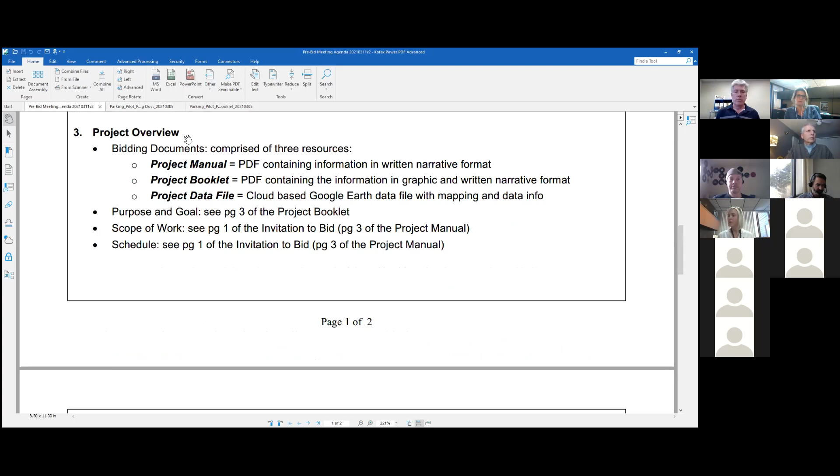Much more detail to the project, and we'll spend some time talking about some of that. Our schedule - if you've had a chance to look at the invitation to bid, you've already seen our layout, and I'll just run through this pretty quick because this is all pretty important.

We're here now today at the March 11 pre-bid conference on Thursday. I don't know how many of you saw the old version of that, but I did put out something that said Wednesday, March 11th - I apologize for any confusion that may have been there. A week from today is our deadline for questions. The following Monday is when we will be issuing our final addendum. And then bids are due a few days later, two weeks from today.

We're measuring time on local time. Somewhere in this timeline we're going to go to daylight savings time, so that's why we're using our clock - it's mountain time. It doesn't matter whether it's standard time or daylight savings time, no extra hours in there for anybody.

After we get the bid opening - bids open on Thursday the 25th - we'll be moving through the contracting award and contracting phase of things. We're anticipating things will go smoothly. We've got a pretty aggressive schedule here to get to a notice to proceed and sign contracts about two weeks, a little over two weeks, after the bid opening. And then there's about five weeks to substantial completion and another week to final completion.

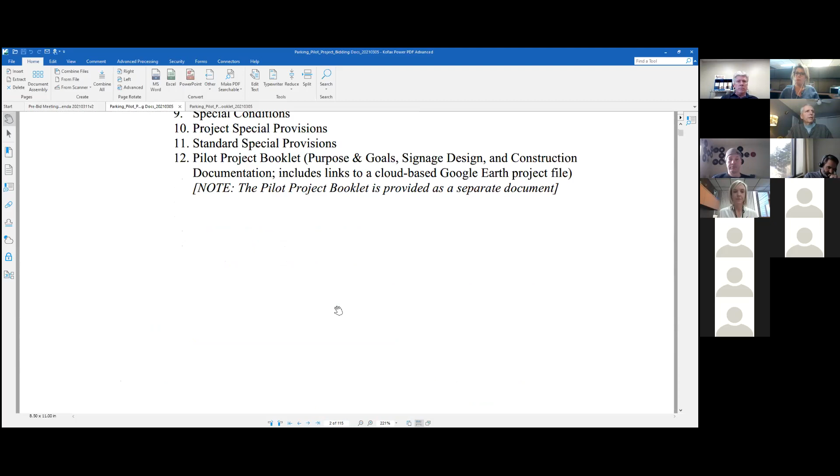Invitation to bid, I think, is pretty straightforward. We've already touched on, at least pre-bid wise, that's probably all the most important stuff we've already talked about.

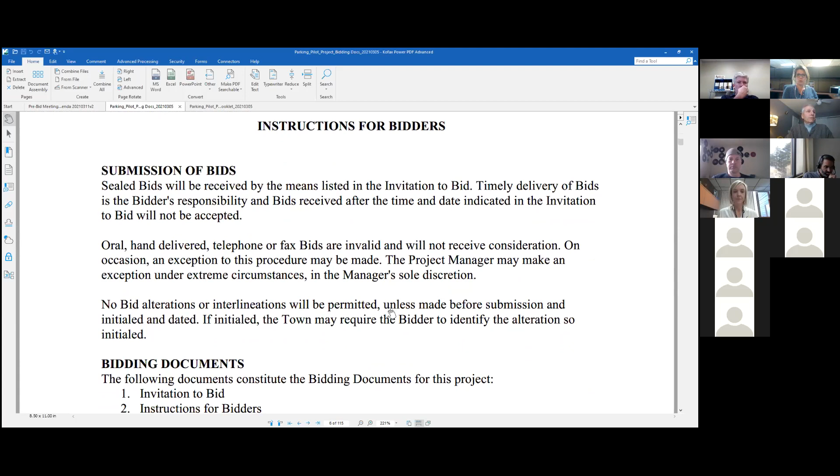Instructions for bidders. There's lots of important stuff in here for you guys and gals. This list here is what will end up being the official list of bidding documents when we get around to signing a contract. So pay attention to all of these documents. Everything except the addenda has been issued to this point.

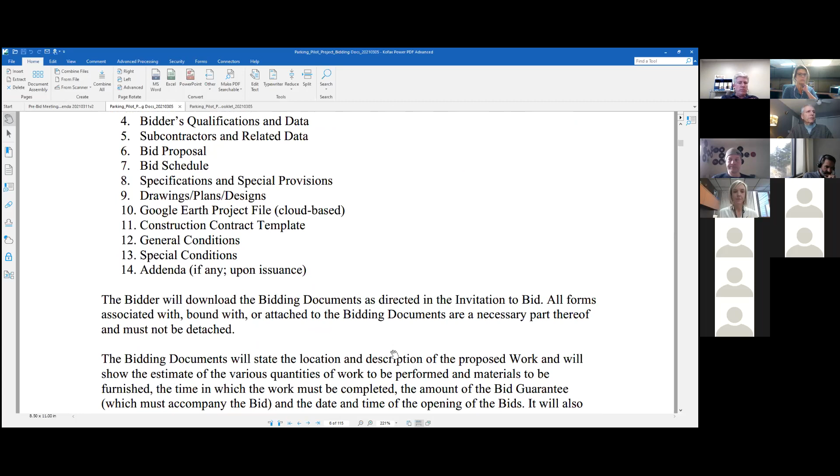Hey David, I just wanted to let you know we did have a Frank Cordova join the meeting, so that you're aware. Oh, well, thank you. Frank, do you want to introduce yourself? Everybody else did, but we'll only make you do it now. Yeah, hi, I'm Frank Cordova with ProPrint Design as well. Okay, great. Thank you, Frank, for joining us.

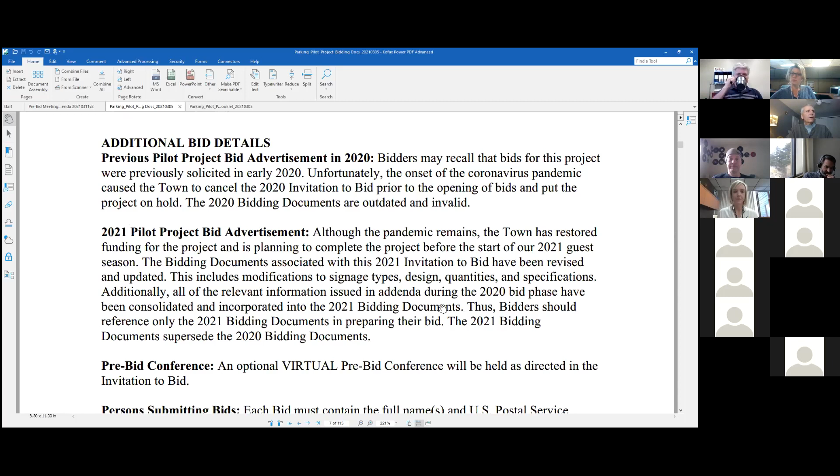This project has one unusual feature. Some of you may be aware, some may not, but we did advertise this last spring. In fact, our pre-bid meeting was just about a year ago. We're a week shy of a year - it was March 18th a year ago when we had the pre-bid meeting. For all practical purposes it's a similar project, but we've made some changes to it. So if you're aware of that earlier project, ignore everything. Pay attention only to the 2021 bidding documents.

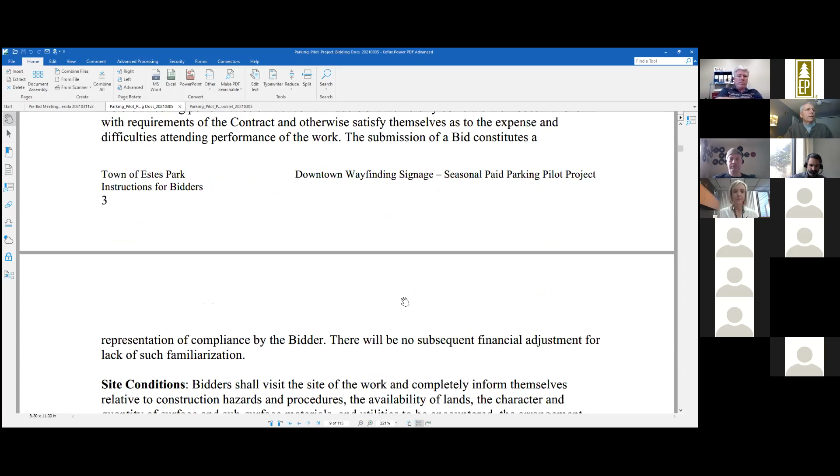Lots of details and instructions here. We will be issuing addenda, hopefully one, if not hopefully two. We are going to be asking for questions in writing. Obviously that's a real straightforward way for us to keep track of the questions and provide thorough answers that are distributed to everybody.

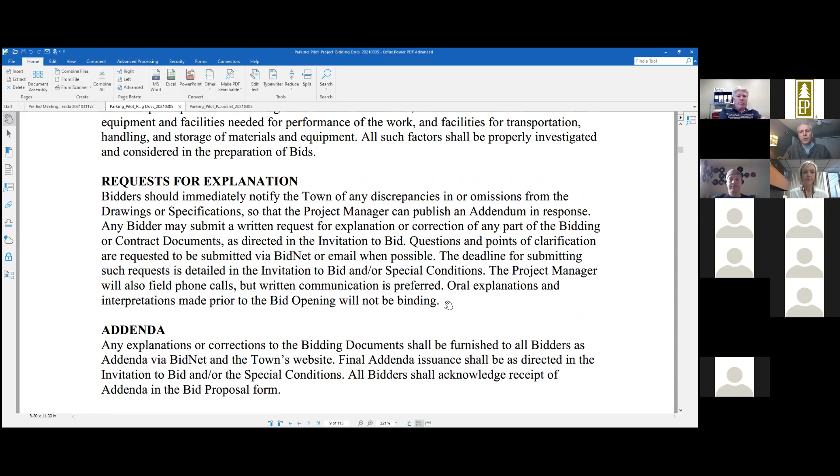There's a bid guarantee required. There's some bonds required as a part of the contract process. We already talked about opening bids.

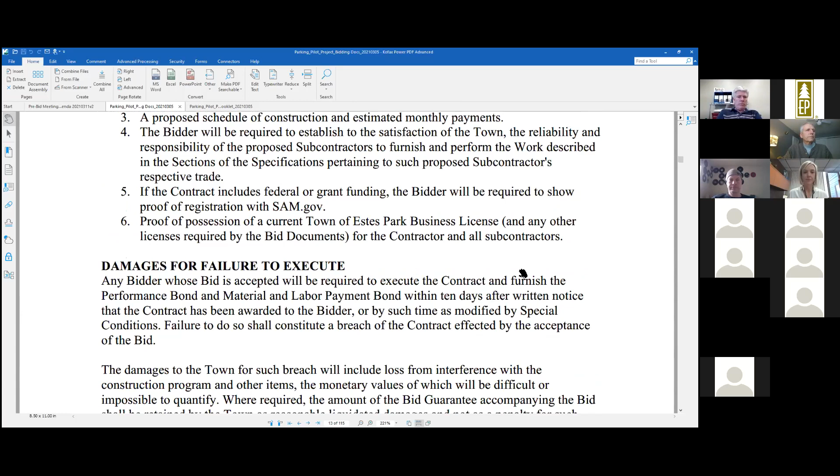We do have a couple of forms for the bidders to fill out. First one is this bidder's qualification and qualifications and data. So we're looking for the bidders to provide some background on the firm and projects. There's also a separate sheet for subcontractors. So that's the next form here, looking for you to identify who your subcontractors may be, so that we can be aware.

Seeing this here, let me just take a sidebar. All contractors doing business in the town do need to have a town business license. So that includes the prime contractor, the bidder, and any of the subs. And so those business licenses can be obtained online through the town's website. If you go to the town clerk's webpage, there are some easy links to find out how to do that.

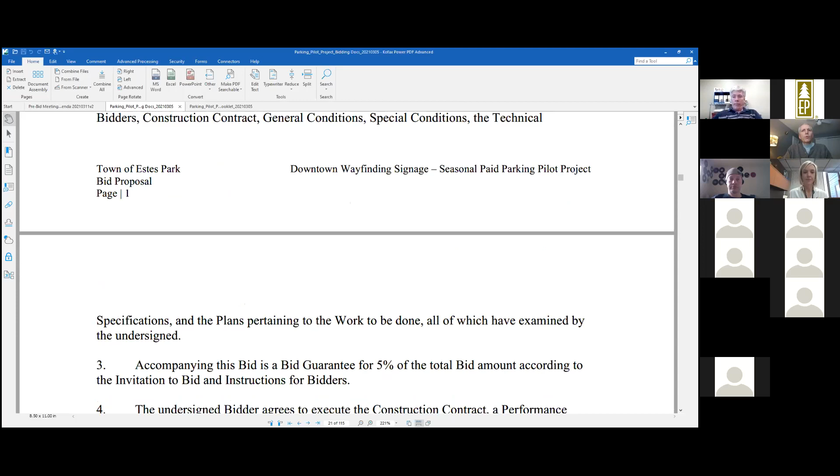The next form is the bid proposal. So this is something you'll have to fill out and complete as you submit your bid. Probably not very much different from what you've seen before, looking for some basic information and acknowledgements. Sign and notarize. And then the bid schedule.

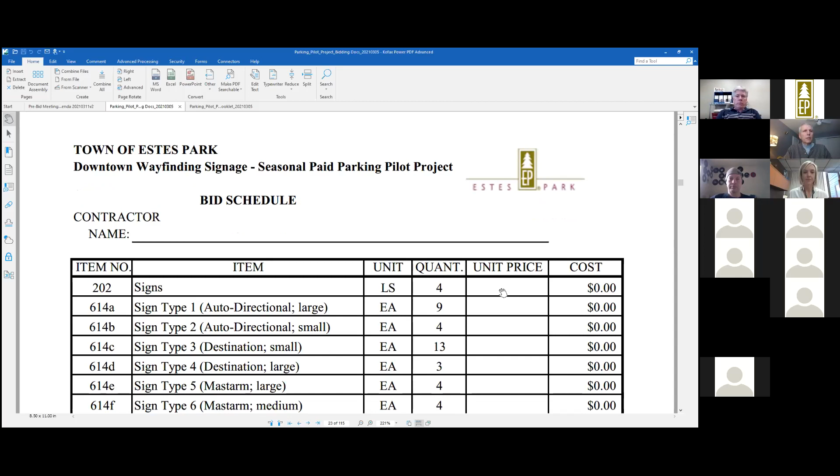There's actually two of these in the set of documents. What we're looking at is part of the PDF set. We've also provided you with an Excel spreadsheet as a part of the documents that you download. You're welcome to fill this out by hand, or you're welcome to use the Excel spreadsheet and let the spreadsheet help you do the math. But I think this is pretty straightforward.

But while I'm here, let me just do another little sidebar. Obviously, I see my first typo, something we'll have to clarify in an addenda. This first line item is actually sign removals. I apologize for the typo, but we'll clarify that. There are some ground signs that we ask you to remove as a part of your work. There's 4 of them, and the locations of those 4 signs are described in the Google Earth file. We have, again, apologies for the typo here on the item.

We do have 10 types of signs that we've identified. There are 2 types of auto-directional signs, and we're real scientific here - we've got a large version and a small version. There are two types of destination signs, again small and large. We'll talk some more about those distinguishing features in a little bit. We have three types of mast arm signs, signs that are going to be mounted on signal pole mast arms - there's large, medium, and small. And then we have some add-on panels that say visitor information or visitor info, and again we have a large version and a small version of that. And then another add-on panel that's free - so the message is free and no installation is required on that sign. We're looking for those panels so that we can add them when we get to the end of the seasonal paid parking period. We can cover up the paid message with a free message.

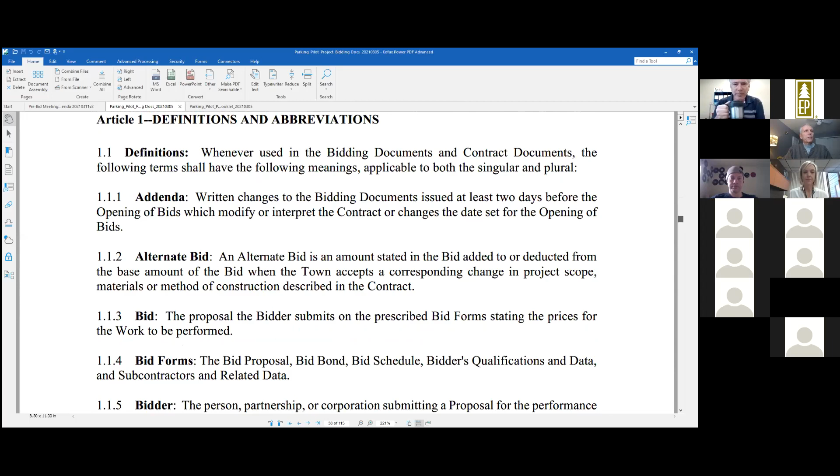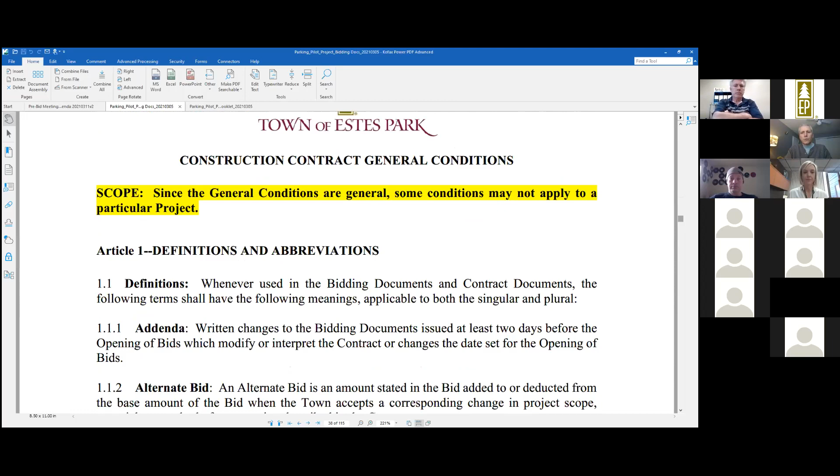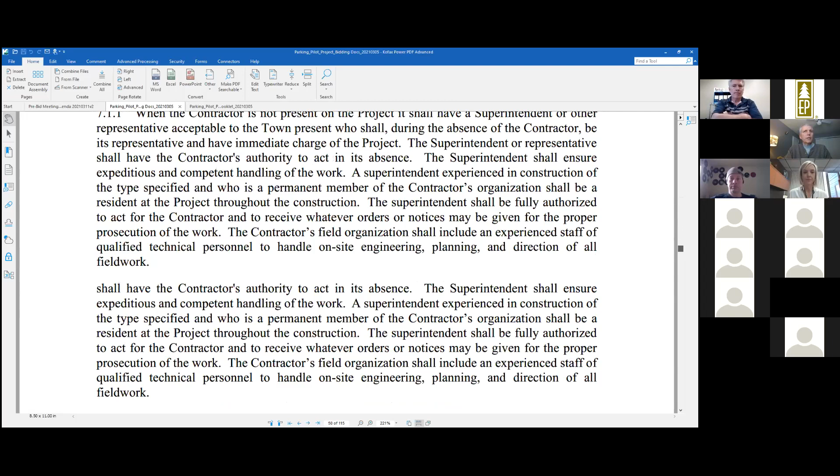The next section is the general conditions. There's another 10 or 15 or 20 pages of general conditions, probably not unlike what you're used to seeing in other projects. I'm not going to go through anything in here. I think it's all pretty straightforward, but if there's any questions on that, you can get clarification through the question and answer process.

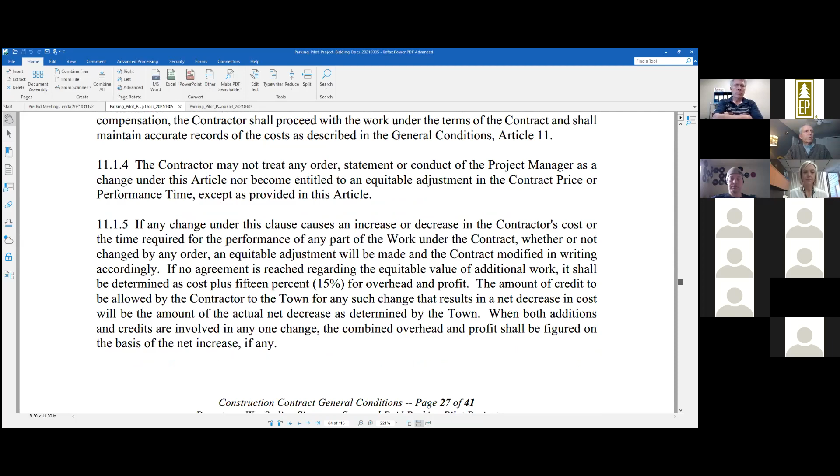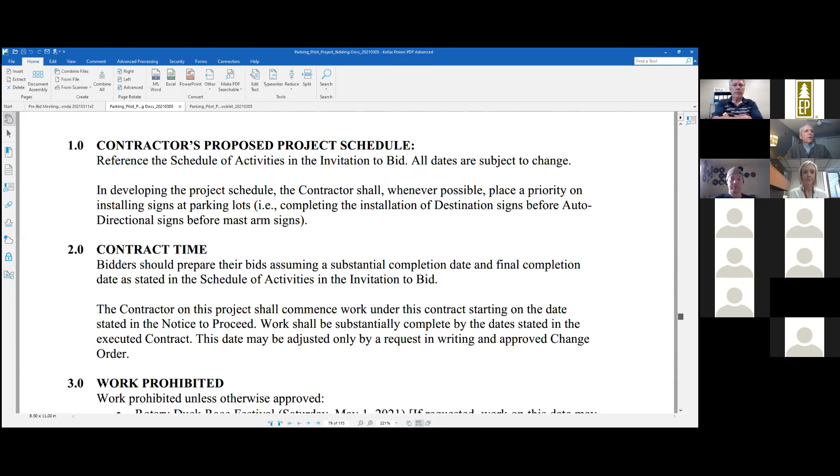The general conditions are followed by the special conditions. Sorry if I'm making anybody queasy as I scroll through things here. So the special conditions, there's just a couple of pages of these.

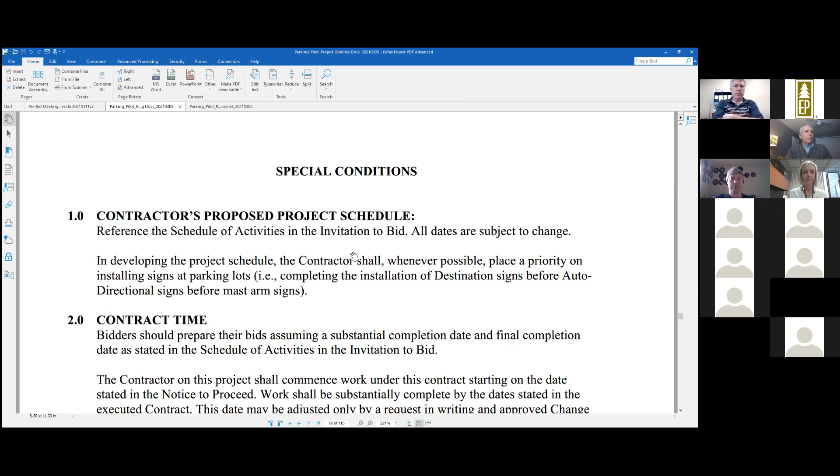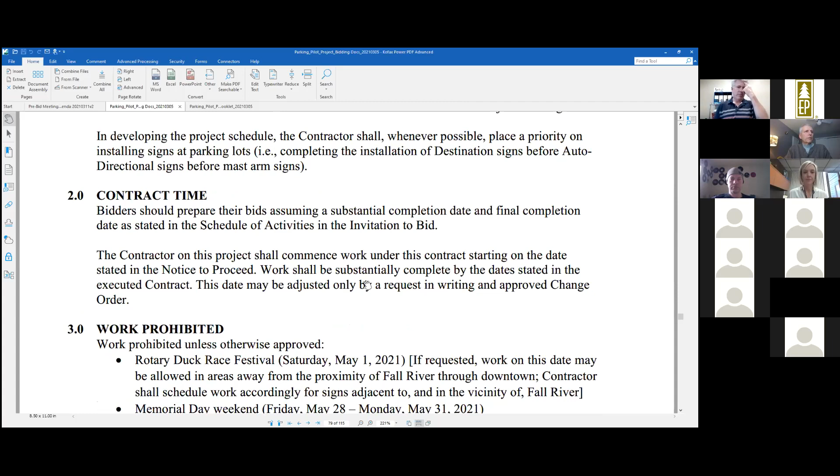We're emphasizing our expectations as it relates to a project schedule. We're emphasizing how we're measuring the contract time.

We do have a long list of work prohibited dates. This is an annual calendar that we would normally include. If all goes well, everything but the first bullet point is going to be outside the time frame of this contract, but we just drop this in as a standard.

As it relates to the first bullet point, this Rotary Duck Race Festival is a fundraiser by the local Rotary Club. It is on Saturday, May 1st. You wouldn't normally be working on a Saturday, so we're just reemphasizing here that if that becomes necessary on your part, some work in some parts of town may be allowed, but in the areas where the festival is going, which is a good portion of the downtown area, it's going to be tough to allow any work in that area on that date.

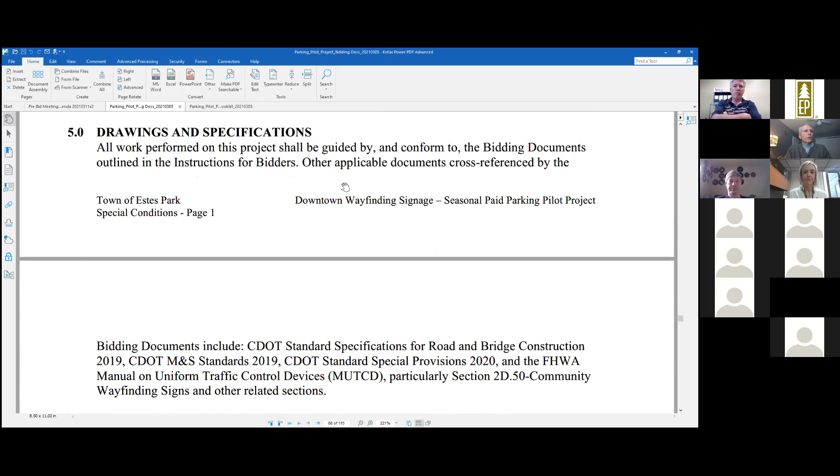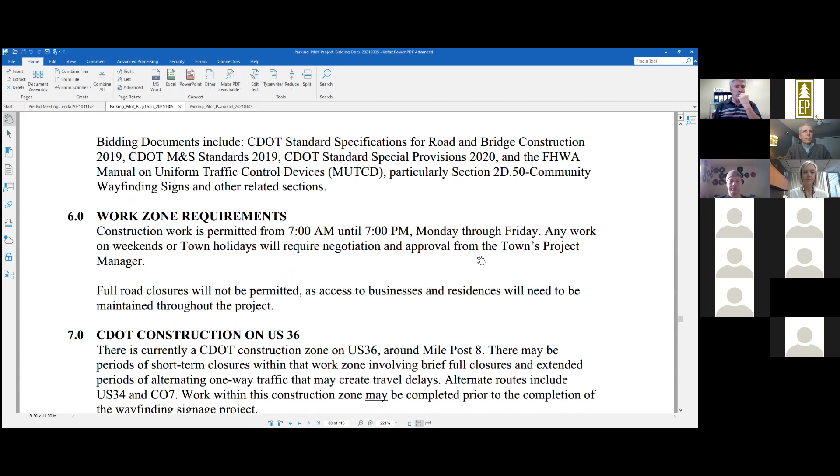Some more listing of general expectations, related to the Saturday work, here's our work zone requirements. Normal work days is 7 a.m. to 7 p.m. Monday through Friday. Weekend work or holiday work needs special permission, so plan accordingly.

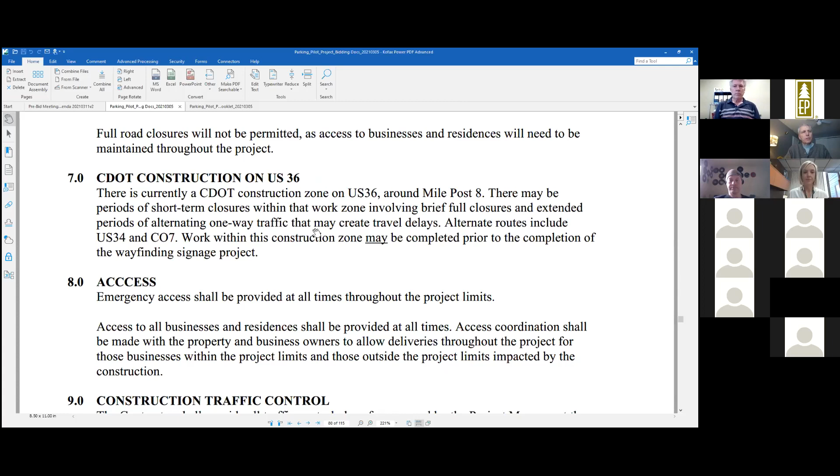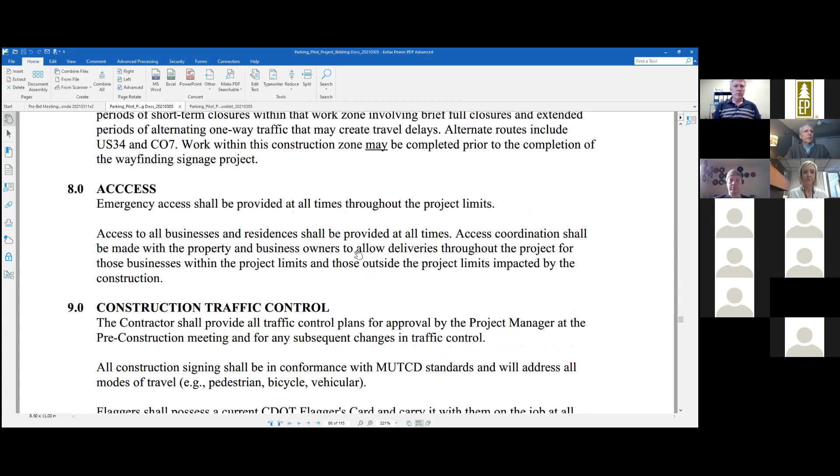There is this construction zone on US 36. Some of you are probably aware of it. It's not nearly as active as it was a year ago, but they are still incurring temporary lane closures as they do some ongoing work. I'm not sure when that'll wrap up. I'm guessing it's winding down pretty significantly now, but that may be something you need to account and anticipate.

Stormwater quality. It is your responsibility as a contractor to determine whether a stormwater discharge permit from the state is required for this project. If it's not required, then fine. If it is required, we're going to expect you to have it and provide us with some documentation.

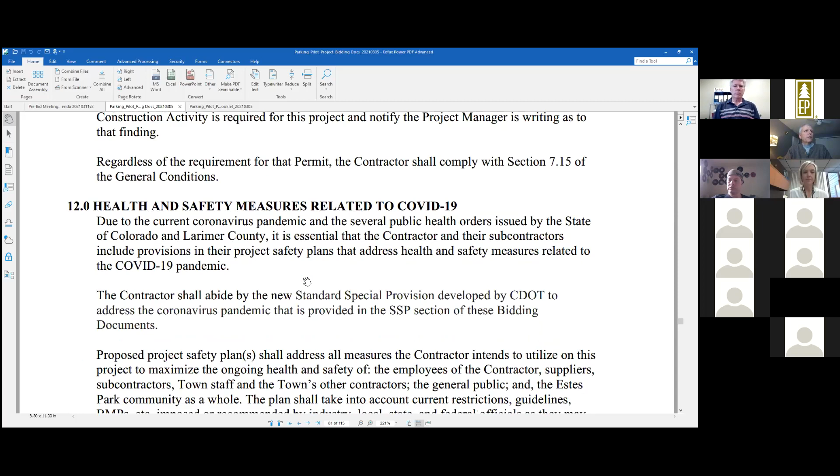Health and safety measures related to COVID-19. I wanted to touch on this because this obviously is something we're all dealing with. We've all been dealing with it for a year now. And even though things are getting better, it's still something we all have to be aware of as far as how we behave as individuals, how we behave with our crews, how we interact with each other. The underlying message here is that we at the Town of Estes Park expect our contractors to follow all state and county and local guidelines. As long as you're following the guidelines, things are going to be fine with us.

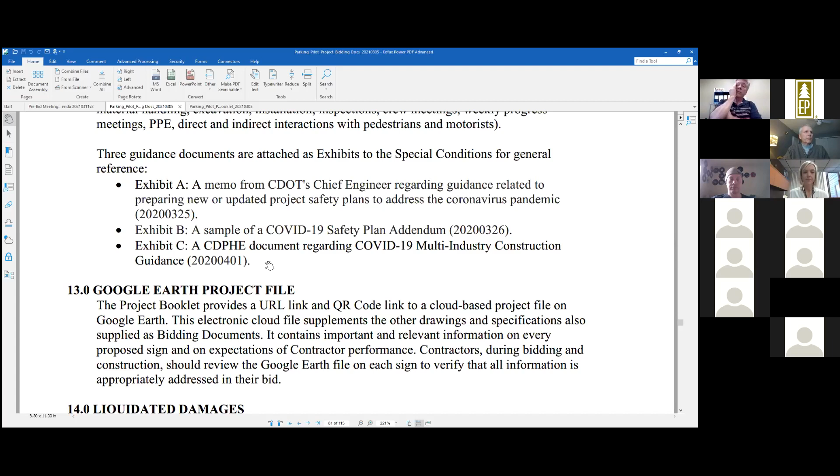There are a couple of exhibits that are attached to the special conditions. They're there for your reference. There's some documents from different state agencies that will help give you some insights to part of our expectations. I mentioned the Google Earth project file a little while ago. We'll get to that in a minute in a little more detail.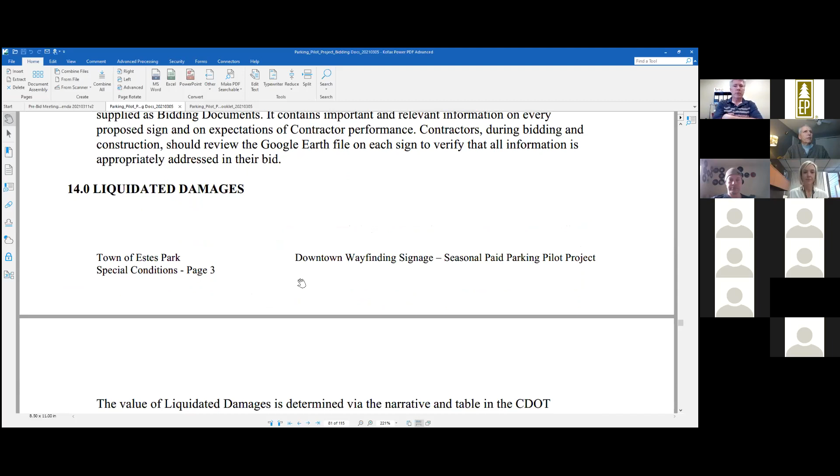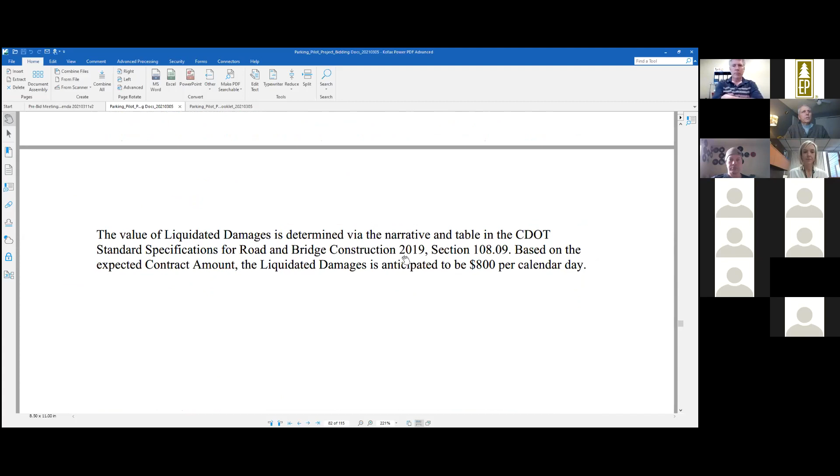The liquidated damages is based, according to CDOT's formula, on contract value, and based on what we expect this contract value to be, we've gone ahead and pulled that out of their table. But you can cross-reference this section of the CDOT specs if you need any further clarifications.

So those are those exhibits I'm scrolling through now.

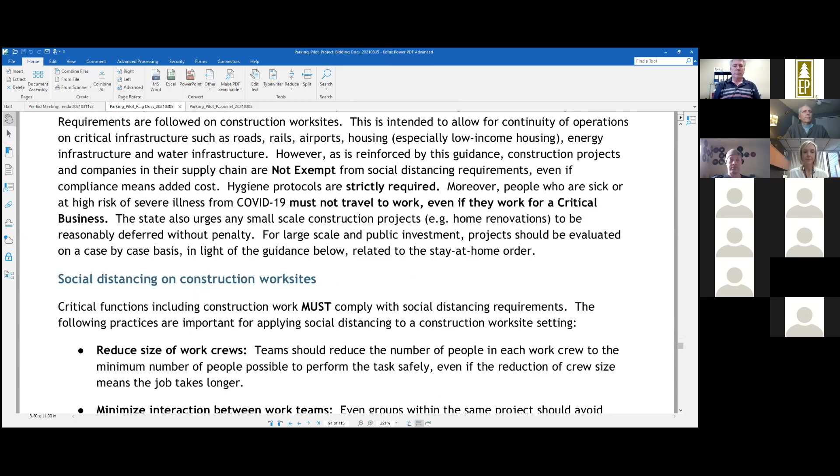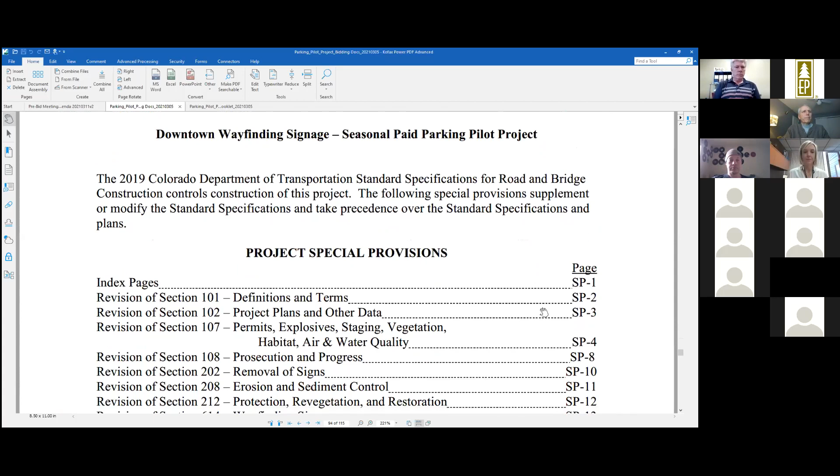And we get to the project special provisions. These are some specifications where we at the local level have elected to modify the state specifications. I'm not going to go through each and every one of these. I'll let you absorb them and offer written questions if you have any. I think they're all pretty straightforward.

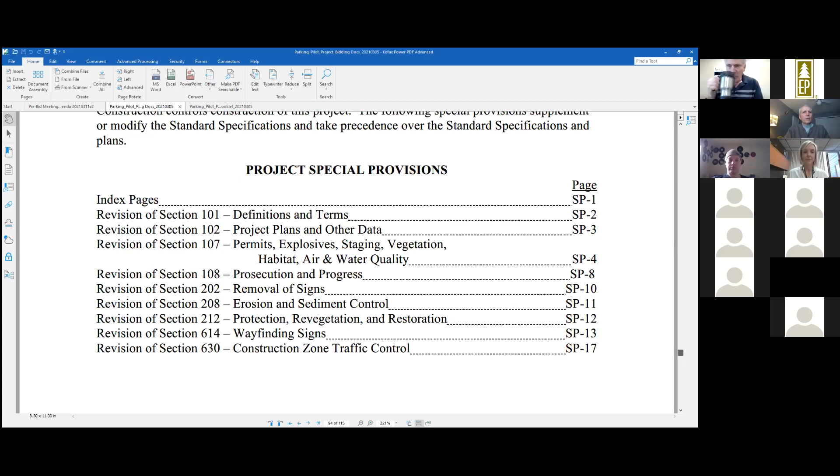The most significant you'll find is in section 614. 614 is a section of the CDOT specs that deals with signage and traffic control, routine or regular traffic control, not construction zone traffic control. So we've inserted a lot of additional details in there that we feel are necessary to focus on our special project that's dealing expansively with wayfinding signage. So do in particular pay close attention to the contents in there. I will scroll down to that section right now to highlight a couple of things.

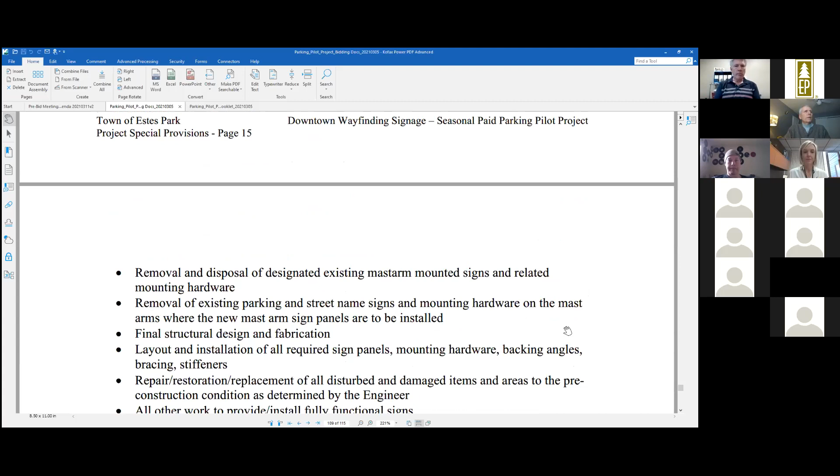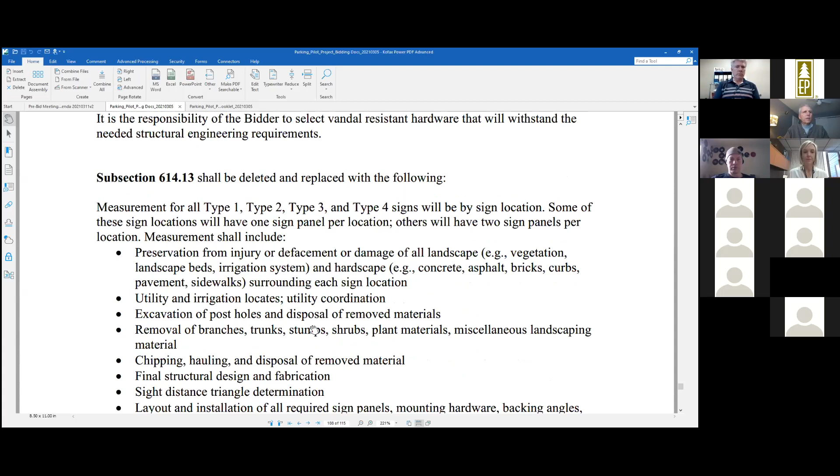In the measurement section, 614.13, this goes through and describes how we're measuring things for payment. This will be insightful to all the bidders to know what work is incidental, what work is to be included in different pay items, all related back to the bid schedule we saw earlier. So be sure you read through all of these details.

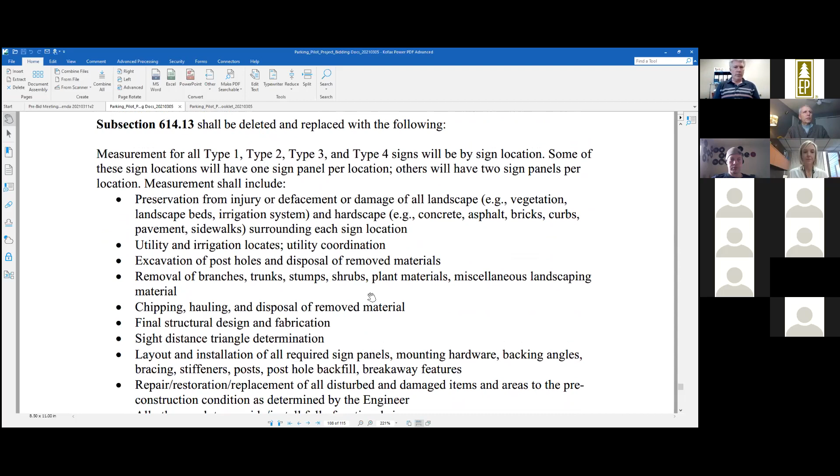Here where this first section talks about the type 1, type 2, type 3, and type 4 signs, and the things that we are expecting you to include as costs related to those pay items.

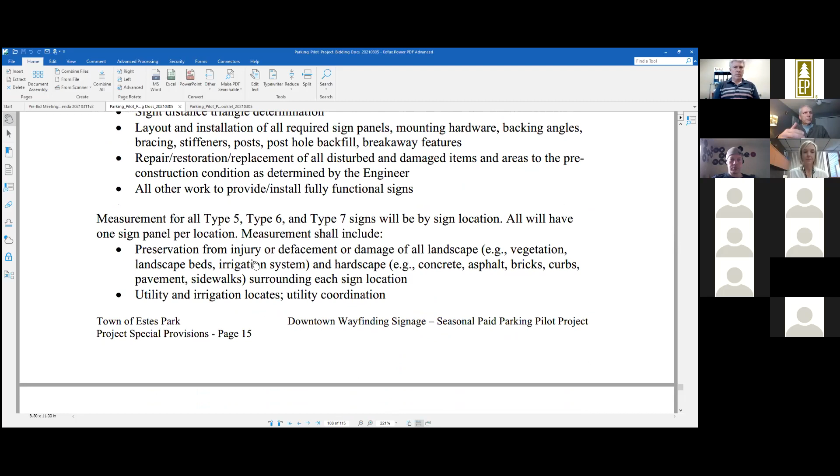And then there's a separate section for the type 5, 6, and 7 signs, and all of the things that we expect you to include as pay items are in those particular pay items.

And then there's a third section here for the type 8 and type 9 signs and the things that relate. There's a lot of similarity between these, but there are some differences, and that's why they're outlined separately.

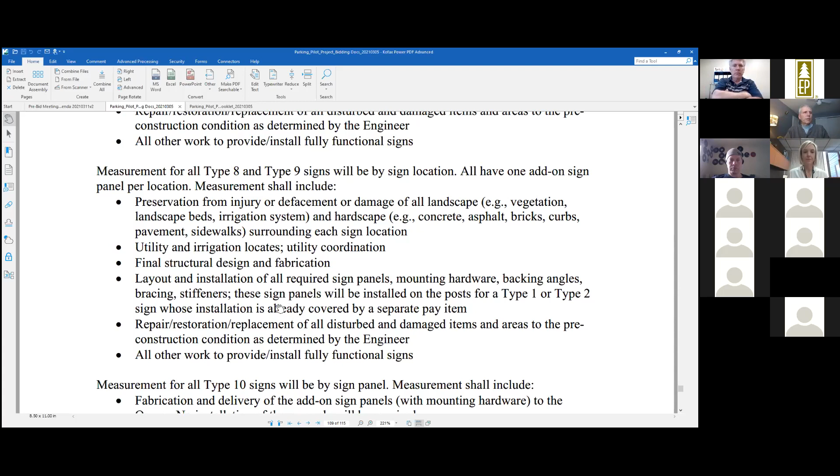The type 10 signs are those add-on signs that don't have installation, and so that's the easiest. It's only got one bullet point. We're just looking for you to fabricate them and deliver them to us.

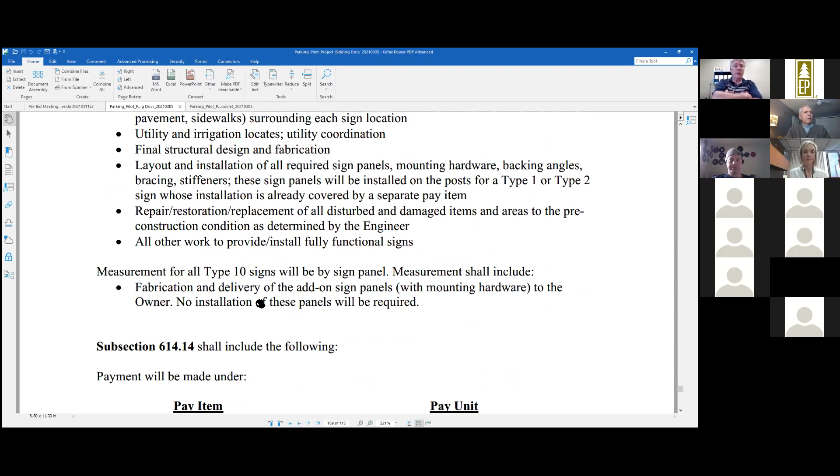And then related to that is section 614.14, where we're emphasizing here that these are all measured on an each location basis. There is some clarification above that says each really means a sign location. Some locations have a single-sided sign, and some locations have 2 sign faces on either side of the mounting posts. So we're not talking about the number of sign faces, we're talking about the number of sign locations.

And the distinction between whether a location has 1 sign or 2 is detailed in both the booklet and in the Google Earth file. That'll help you keep your inventory straight as you tally up sign faces to a total of sign locations, and then start to be able to fill in your bid schedule with your unit prices.

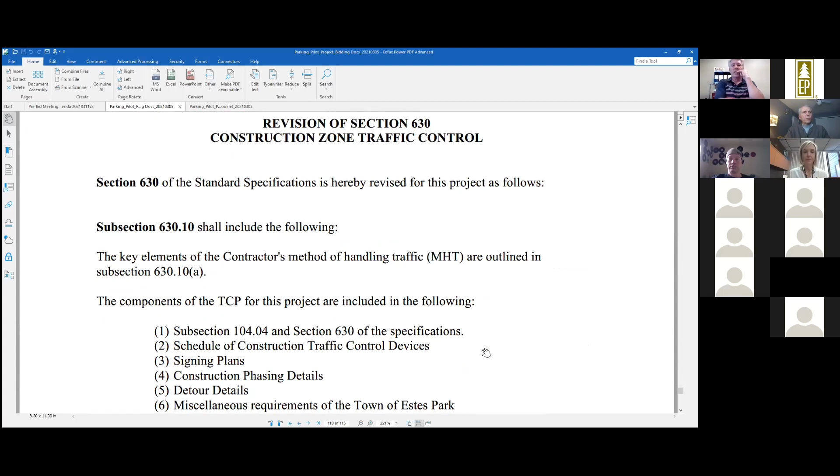And then there's a section on construction zone traffic control. These are some modifications that we feel are important to detail because of the things we look for locally. Now let me elaborate on this a little bit.

Some of the work is along CDOT highways, and some of the work is along town roadways. As it relates to traffic control, really there's going to be no distinction. A CDOT right-of-way permit or a CDOT special use permit will be required for signage along the CDOT right-of-ways, and a town right-of-way permit will be required for installation of signs along town right-of-ways.

Let me start with the town right-of-way permit process. A member of my staff, Ryan Barr, is that right-of-way permit contact. Contractors will be responsible for getting that right-of-way permit. The fee associated will be waived. The application process and approval process will be very simple and straightforward in dealing with Ryan as an internal town project.

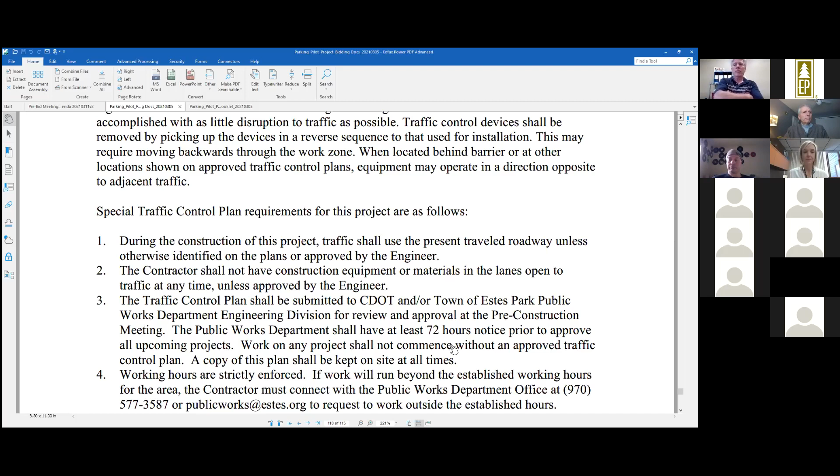We're not trying to make this overly difficult. We're all for streamlining the process, but what's really important is that we're protecting the public, the traveling public, both the pedestrians and those in a vehicle or a bicycle that are on wheels. So do anticipate getting involved in both of those permit processes once a notice of award is made.

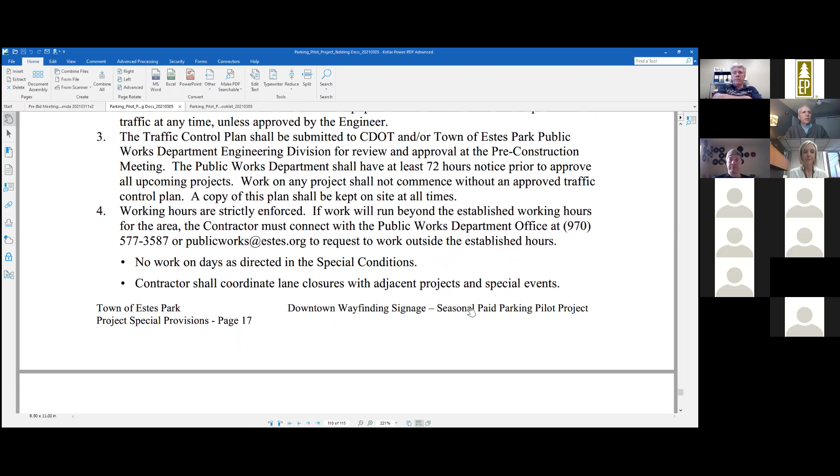And that, I think, brings us to the last item, and this is the CDOT standard special provisions. These are CDOT exceptions or updates to their own standards, their own specifications. These are all available through the CDOT website and will apply.

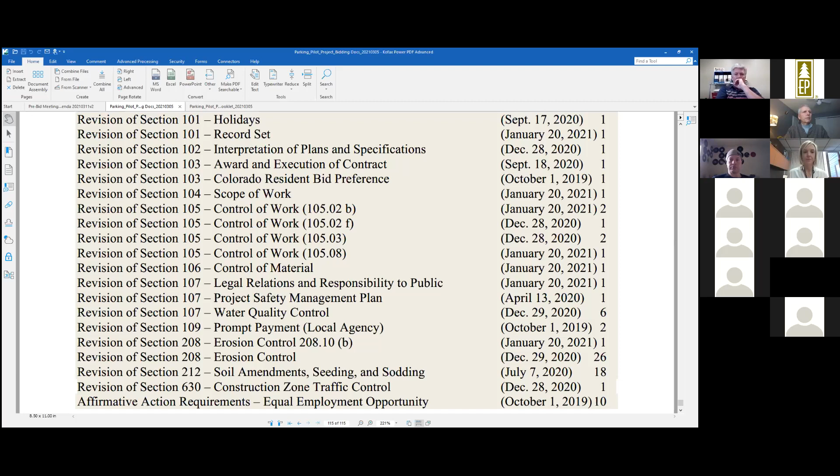So let me move on to the booklet.

There's some introductory information regarding our sign design approach. You can digest that and ask questions as needed. This table gives another summary of the 10 types of signs that we have, along with some quantities and some cross references to other pages farther down in the booklet.

Here's the first of our typical signage. These are the two types of auto-directional signs. It gives you some basic sizes and some basic expectations on the posts and the breakaway feature and how they might all come together. It also gives a bit of a scale perspective to things.

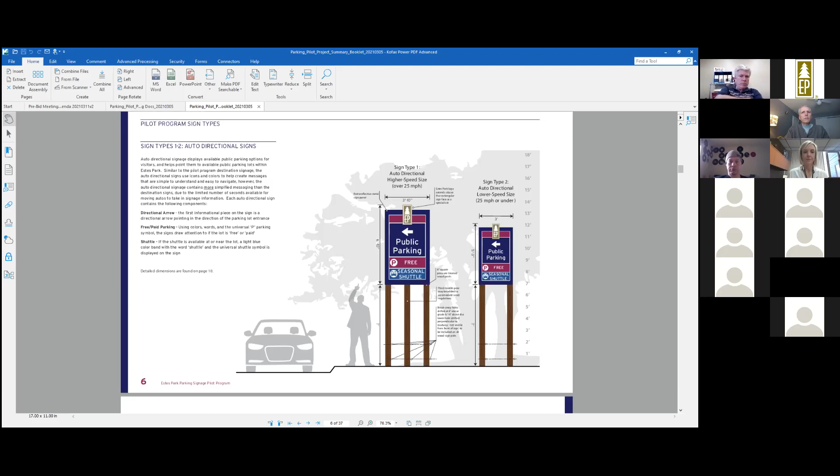The next set of typicals are for the destination signs. Same sort of setup. There's two basic signs, little difference in size, and some information as it relates to what goes into the sign, what went into the sign design, and how some of the installation requirements may apply.

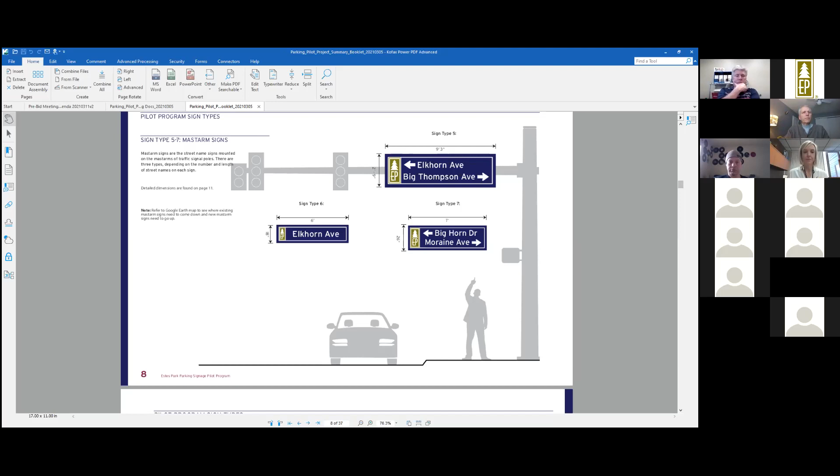Then for our typicals, there's a sheet for the typicals on the mast arms, 3 basic sizes, and this gives you an idea of how they relate to each other, perspective, and into the real world with the mast arm mounting.

Sign types 8 and 9 are the visitor information panels that are highlighted here in the red dash box. There's 6 locations total where we're adding this visitor information panel to one of the already installed or specified destination or auto-directional sign.

So a little bit of an adaptation there to know where that sign panel goes. These are the locations where they're anticipated to be installed. On the free panels, this is where I was saying we've got a free panel that's going to superimpose itself over the paid message here.

And the locations are not so important to you as a bidder as it is to just confirm that this is how we came up with 19. I think it's 18 panels. Anyway, 18 or 19, the count is there.

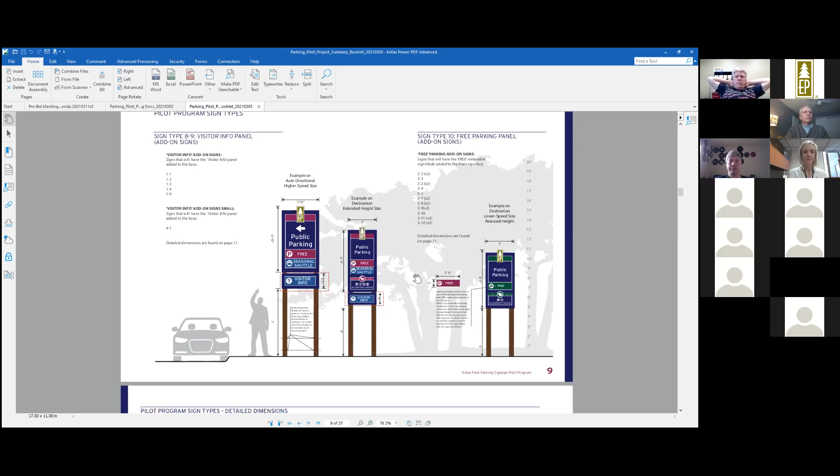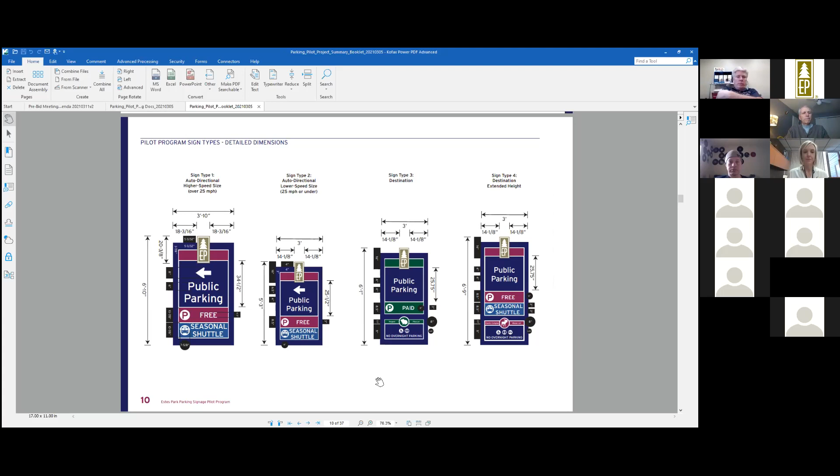Here's some more details as it relates to the graphics of our signs and what we expect as far as spacing and heights and letter size and letter height. This may not be all the detail that's absolutely necessary, but it's a large step forward, and anything that isn't already identified here can be addressed as a part of the shop drawing submittal and approval stage to make sure that we've got everything absolutely squared away as far as widths and heights and colors and dimensions and panel cuts and special cuts and so forth.

More of the same information on the left side of the page as it relates to the smaller signs, the 6 other types of smaller signs. On the right side of the page, let me talk about this for a little bit.

There are a small number of signs that we're expecting to be mounted on existing light poles or existing utility poles. So these 2 pictures here are just as a typical example of 2 of the several locations where we are expecting signs to be mounted on existing poles.

So look at the Google Earth file to identify where those locations are so that you can be sure you understand the numbers and the types of poles that we're asking you to mount to. It'll be the contractor's responsibility to determine what mounting system it's going to take to put a sign in that location.

And then this picture here is just an example of one of our mast arm locations. We have 3 intersections where we're doing that mast arm work. In this case, we would be asking you to remove this street name sign and this green on white parking sign, and then replace it with just the street names, the new street name sign. But those are all detailed in the Google Earth file for those 3 intersections, 12 total mast arm locations.

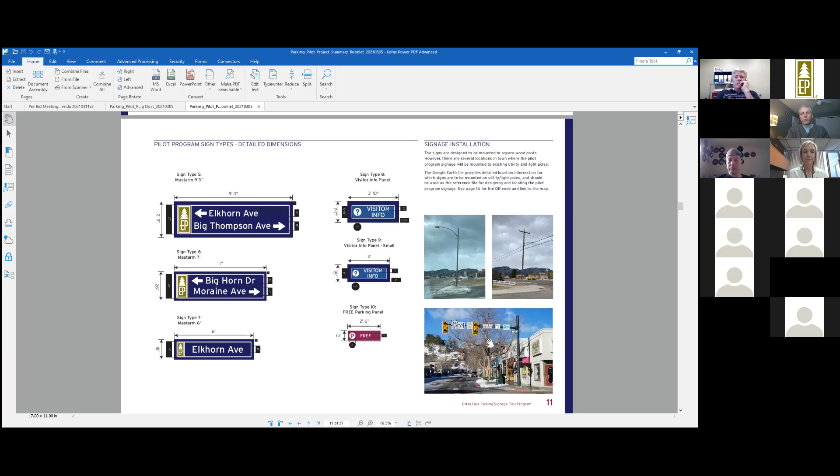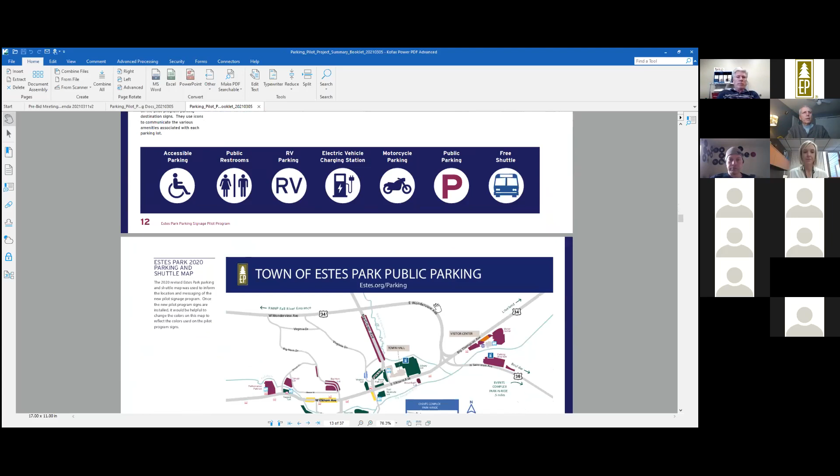This next sheet has some details on our icons that are part of the artwork on mostly the destination signs. Most of that should be fairly straightforward, and you can ask questions in writing for any other clarifications.

This map is just a preliminary... actually, this is the 2020 parking map. There is a 2021 parking map that I missed getting inserted, so we'll make that available through an addendum. But this is just here for reference so that you can get an idea of where we have free parking lots and where we have paid parking lots.

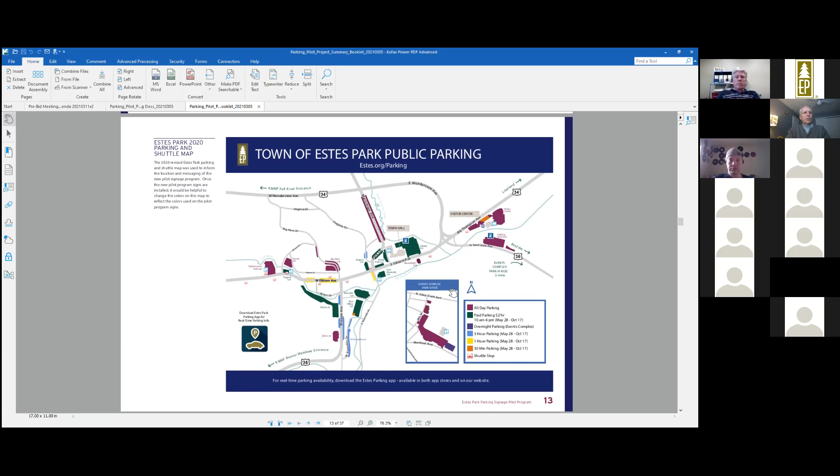Hey David, the graphic is accurate. That is the 2021 parking map. I think the label is just wrong on the page, so I'll make a note of that for the addenda. Okay, very good, thank you for that clarification, Vanessa. Sorry, I didn't catch it earlier, I thought we had inserted it, but obviously I didn't read it very closely.

This is a snapshot of the Google Earth file view. So in a hard copy, non-dynamic sense, you can get an idea of how these different sign locations are scattered around through our downtown and near downtown area. Access to the Google Earth file is real convenient through the QR code and the link provided here.

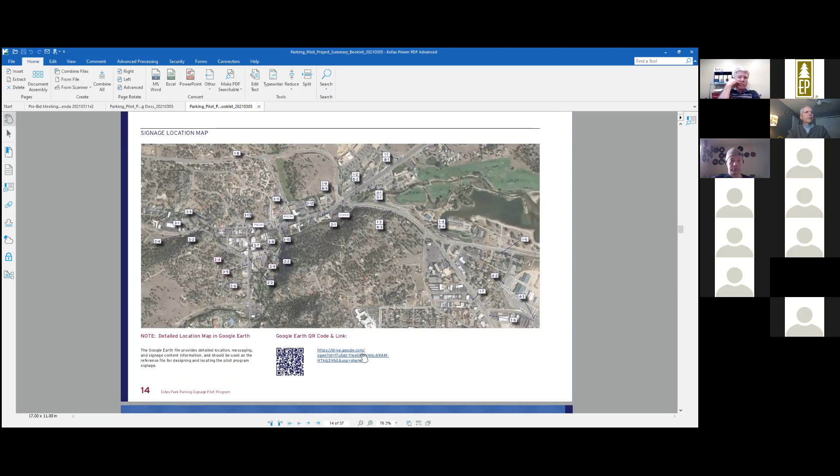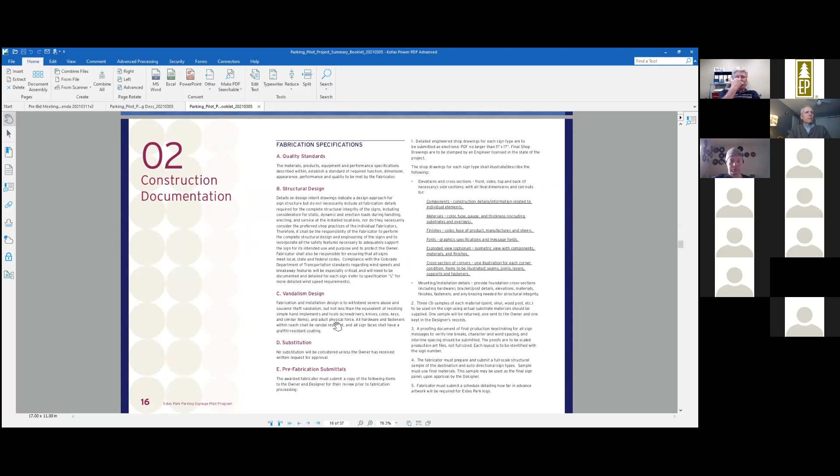There is an element of structural design that's the contractor's responsibility. Several components go into that. Wind load is probably the most significant factor, but even aside from that, we expect you to provide verification that sign panel thickness and anchoring systems of the panel to the posts are all going to be suitable for routine, long life, and through useful life, and also will apply to CDOT wind loads. That'll be part of, obviously, CDOT's interest as part of their permit process, and we have the same interest in preserving signs from not being insufficiently prepared to sustain the winds that we have in our area.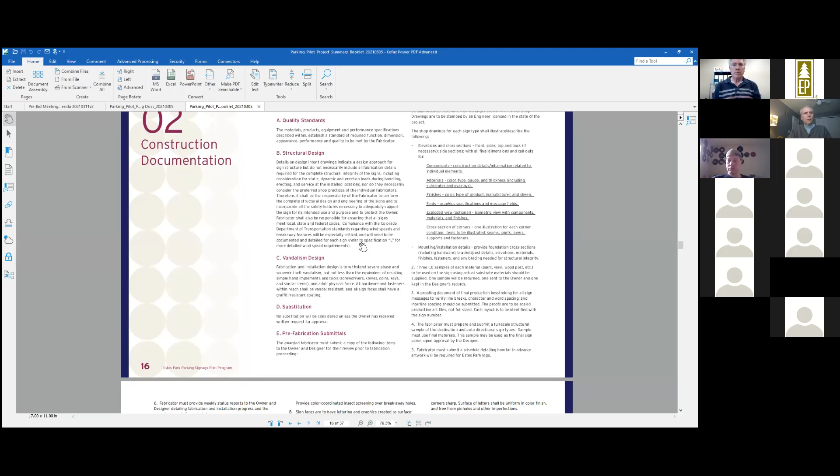Some more discussion here about permits, the CDOT and town permits. Probably most of this is pretty routine for you guys who are sign specialists, so I'll let you sort through what might not be clear to you and submit any questions through written inquiries.

Sight distance triangle is something we're also going to have to coordinate with. Every sign is going to be in some location that has a potential for impacting the sight visibility of moving traffic. The signs at the entrances to parking lots, the destination signs, are probably the ones most susceptible to that, but even the auto-directional signs may have, depending on their location, some impact.

So we're going to have to make sure that moving traffic can see other moving traffic, and even stopped traffic getting ready to enter the road, and vice versa, that stopped traffic on a side street or side driveway has a clear shot of visibility to see all approaching traffic.

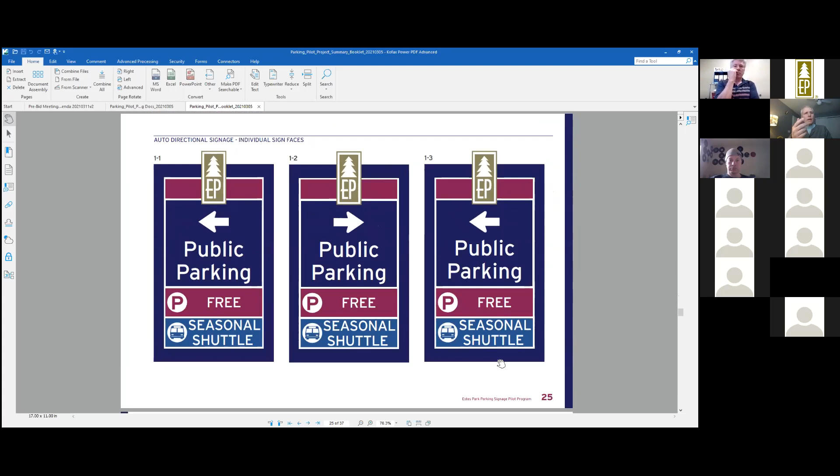The Appendix A has some more details on CDOT standards, graphic standards, and then Appendix B has a detailed sign face for every sign. So this is one of those resources where I mentioned earlier that you can look at an individual sign and see what we're expecting the sign face to look like. And where you see a distinction between single-sided and double-sided, here's an example here. We've identified a single-side sign in this type, and then this is the way we've identified a double-sided sign, a sign

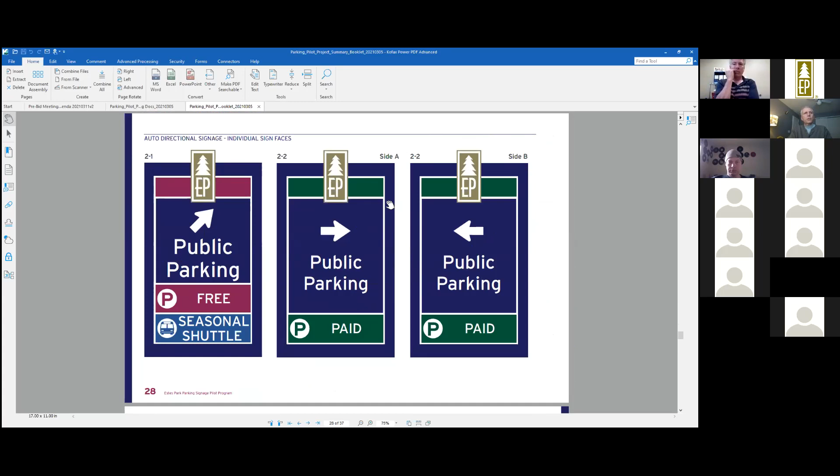location with two sign panels. They're identified as side A and side B. So that should help you make sure that you've got a good count on the number of sign panels versus the number of sign locations, which is the bid item count.

I won't go through each of these, but again, you can digest any questions you have and relay them to us in writing. So that's the booklet, and let me do the

Google Earth file. Can you all see the Google Earth file now? Yes, no? I'm not seeing it, David. I don't know about everybody else, but I still see the booklet. All right, I guess I have to switch. Hang on. Let me stop sharing and then let me share again. Okay, how about now? Do you see the Google Earth file? Now I see it. I think.

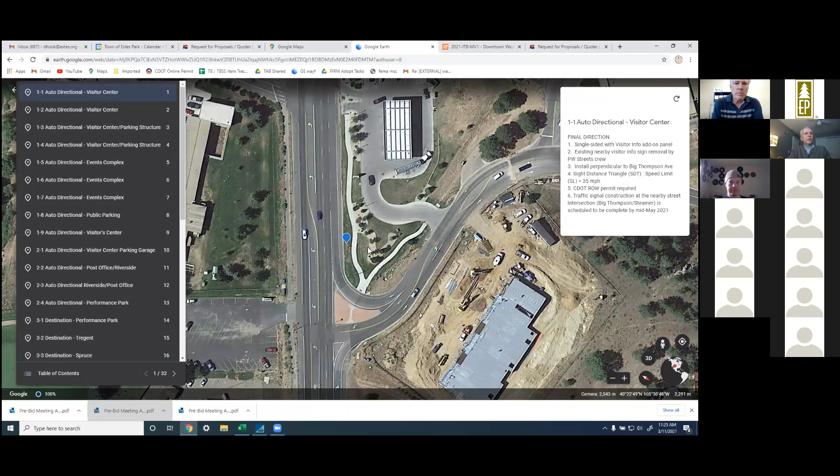Yes, very good. So when you get into the Google Earth file, you'll have access to a table of contents, and this table of contents will take you to a view of each sign. I'm not going to go through every sign panel, but just as an example, you'll see a pinpoint that will represent where we think is pretty close to the desired location of the sign, subject to that field fit discussion I discussed earlier. And you'll get some information about each sign that's somewhat, well, it's all important, but some of it is unique or at least different from other sign locations.

You'll see that there's a mention of whether it's single-sided or double-sided. There are some removals nearby; we'll make mention of who's going to do that. We'll advise that I think in all cases they're perpendicular, but we're just going to provide clarification that we want it installed perpendicular to the road. The sight distance calculations are dependent on speed limits, so we're providing the speed limit for use and reference. We've identified whose permit is required.

And here's just kind of a side note that's unique to this location only. This intersection here with the big pork chop island in the middle is in the process of being reconstructed. And although they're on a winter hiatus right now, come closer to April and May, they'll be doing traffic signal pole installation there.

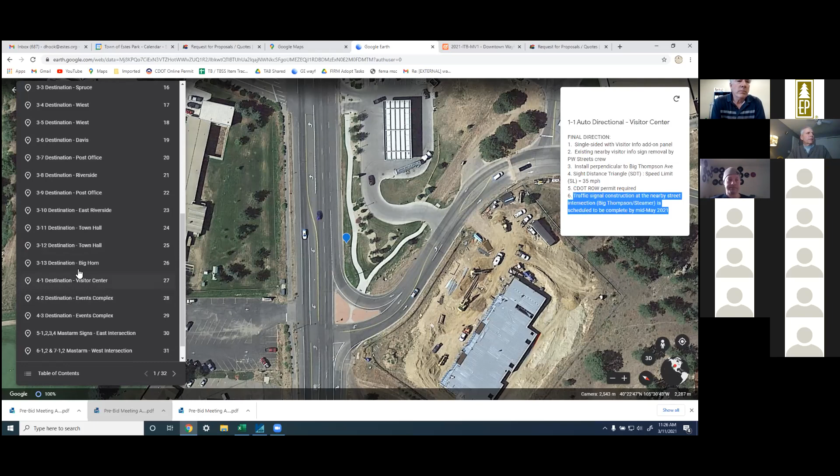Let me find one that talks about the ground-based sign removal that I think is this one. So you can see as you click on something in the table of contents, it takes you to a new sign location. The sign location will always be pretty close to the center of the view. And in this case, I wanted to highlight 2 of the 4 locations that we talk about the contractor being responsible for removal.

In this location, we're putting the new sign on the east side of this driveway. Just to the west side of this driveway, there is an existing old faded overhead or tall wayfinding sign. So number 5 here in the outline is talking about that sign. We want you to remove and dispose of that existing ground-based sign, and then we refer you to section 202 of the specifications so that you know how to account for that being measured and paid.

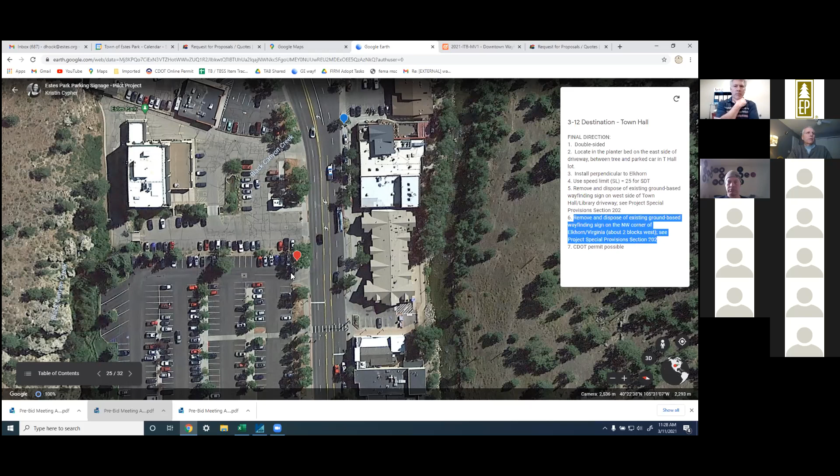In this location, or with this sign listing, we also mention a separate location. It's about 2 blocks away. So let me highlight that and let me zoom out just a bit. So we were right here talking about sign 3-12. At this intersection here, on this northwest corner of Virginia and Elkhorn, there is another similar sign that we want the contractor to remove. And that's what this detail or this narrative is describing there. So please be aware of those 2 rather large sign removals.

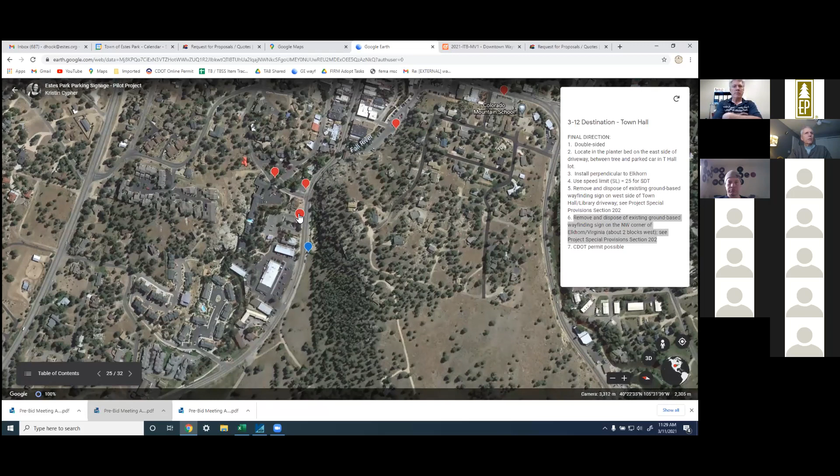There's another pair of sign removals at this location here. Sign number 3-1. There's 2 very short destination signs at the entrance to that parking lot. So we're going to remove the 2 existing destination signs and install a new destination sign there, and the contractor will be responsible for that.

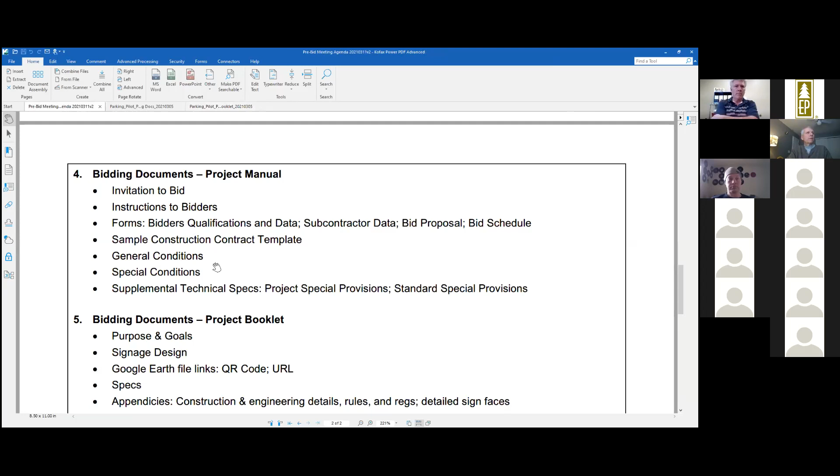So we've run through the project manual, we've run through the project booklet, we've run through the Google Earth file. Now we're kind of wrapping things up with some miscellaneous stuff. Again, just a reminder that there's no group site visit. Visit the site yourself, please, and submit questions by next Thursday in writing.

The pre-bid meeting will be recorded. We'll make sure, through an addendum, that you know how to access that if you are so inclined. Questions are due by next Thursday, 2 p.m. Bids are due two weeks from today, on March 25th.

We talked about field fit, important aspects of it being sight distance triangles, locations of utilities and irrigation, and the protection of landscaping. I didn't talk much about protection of landscaping. Because you're working in landscaping beds, we know there's going to be some disturbance, but we're not looking for those beds to be disturbed any more than necessary. What does get disturbed will have to be restored.

That'll involve some coordination with our parks folks, Brian Berg to start with. We're mostly concerned about major damage, like scarring trees or knocking them over, or damaging overhead limbs that don't need to be damaged. There is an element of restoring what you disturb.